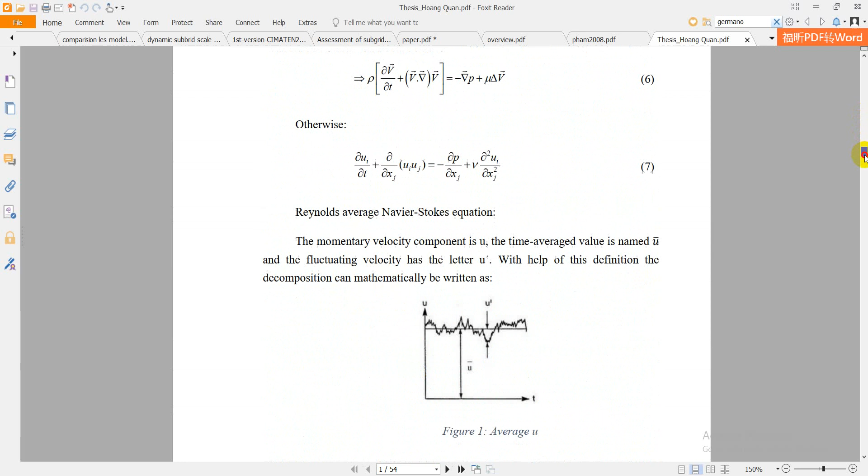So firstly, in OpenFOAM I use the RANS, Reynolds-averaged Navier-Stokes equation. After we solve the turbulence and the velocity pressure, we want to solve the energy equation. Here is the energy equation. I want to solve in transient flow, so I add the DT.

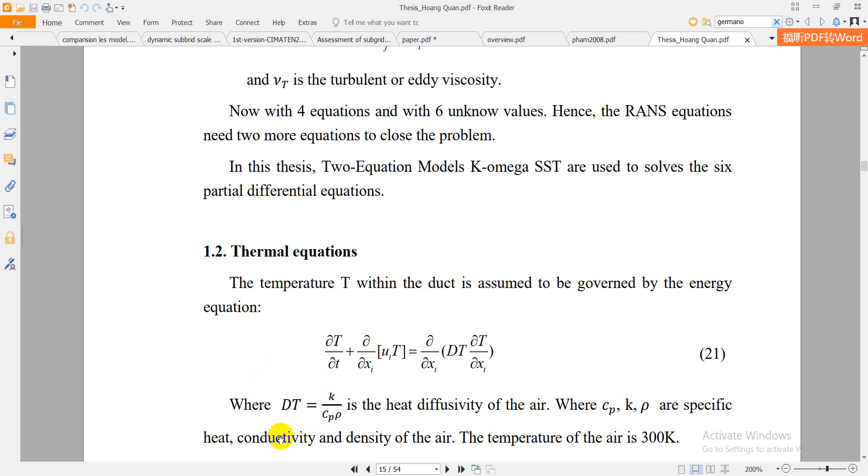DT is the heat diffusivity of the air, with K the air conductivity, Cp the specific heat, and rho the density of the air. So I will add this equation to pisoFoam, and change pisoFoam to my pisoFoam, so the software can solve the temperature for me. I will let you know how to do that.

Firstly, we must copy the software pisoFoam to these files. So just copy it here and change the name. For example, I will go to the software pisoFoam, cd application. Because OpenFOAM is like a lot of software, not only one, we can modify a software without any effect on another. So it's really good.

Go to incompressible, pisoFoam. Here is pisoFoam, and we have all the same things. I just copy this, copy it here, and change the name to my pisoFoam. In this software we have several files like createFields.H. I change the pisoFoam program to my pisoFoam, and then we copy the files here.

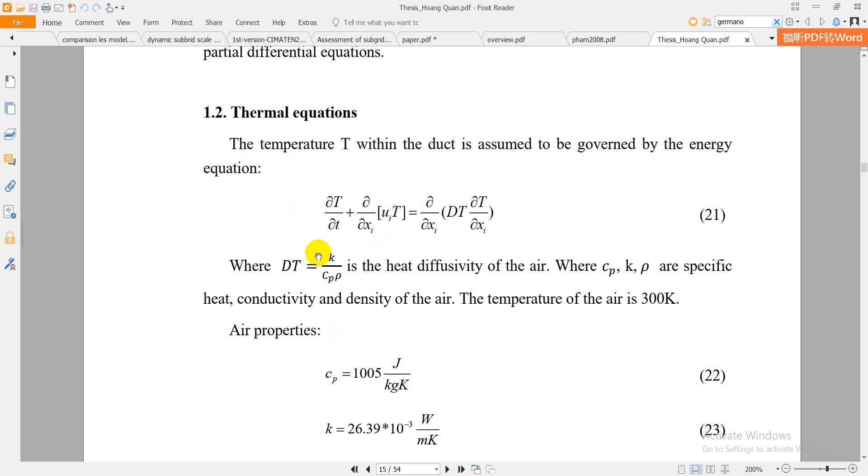It represents this equation, and you can learn more when you read how to write the derivative equation in OpenFOAM form. Then we solve this T equation, solve this equation, and then write it to the mesh file. Here you solve the equation. This represents this equation. All right.

And the next thing I want to show is the P equation. Everything is okay, right? The P equation is solved for pressure, and the U velocity equation, the U equation, is solved for velocity, and the turbulence, etc. And then when everything is done, we go,

I just go out and go to the directory, and cd e, cd mnt e OpenFOAM, cd application, cd solver, myPisoFoam. Here is the file I just modified, and then we just type wmake, and then everything is done.

Make. No. Oh, okay. Let me first, because I had done it previously, I just delete the library of this. Let me check again. And you can go here, and everything is done.

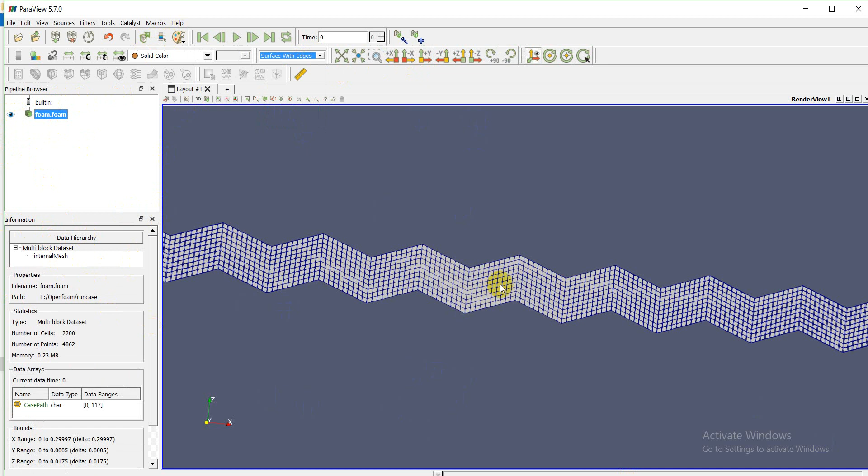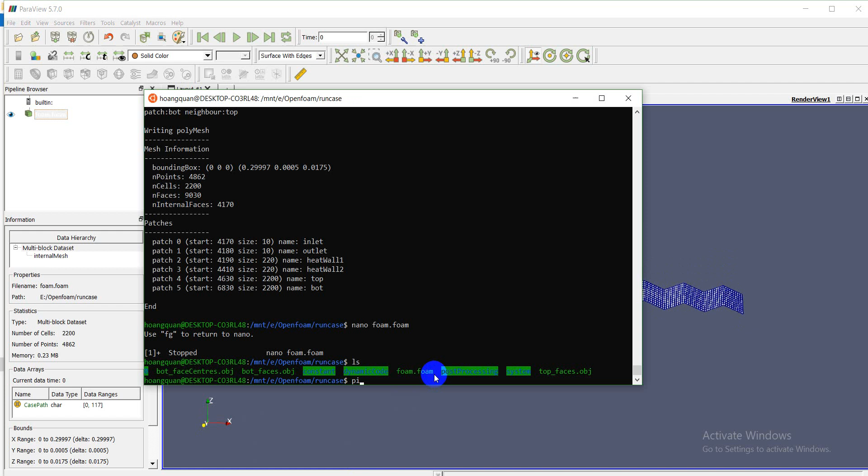Here is the mesh I just created. Very close. So I will run myPisoFoam on that. Firstly, I have the mesh, I run pisoFoam, and you can see the difference, and it's running.

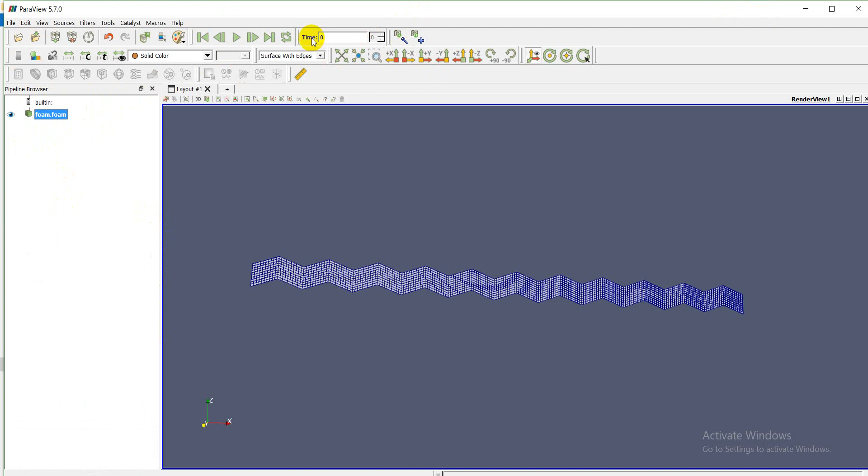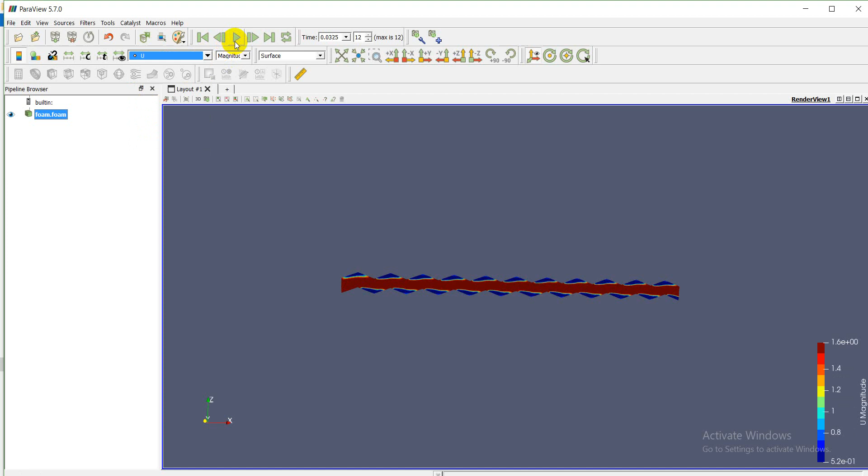Reload file, open foam.foam. Here I have several cases, so I open that. Wait a little bit. Ctrl+C to stop, and then we have several cases here, so just open that, and here you will see we don't have the T. We don't have the temperature here. So I want to use myPisoFoam for that.

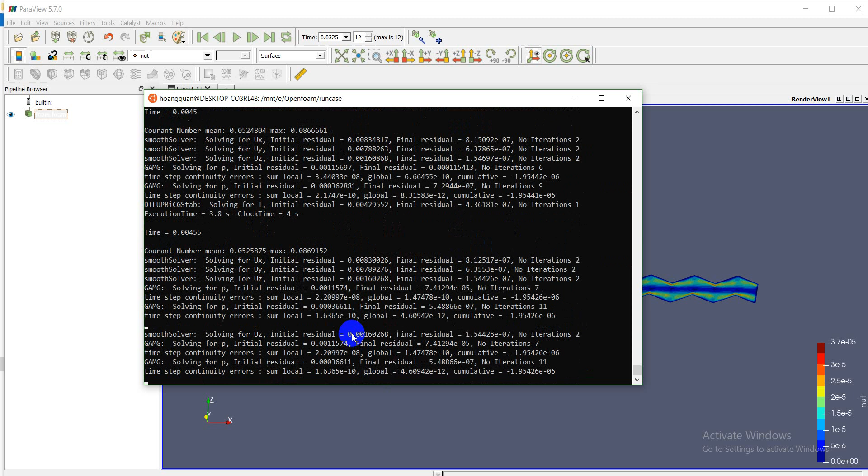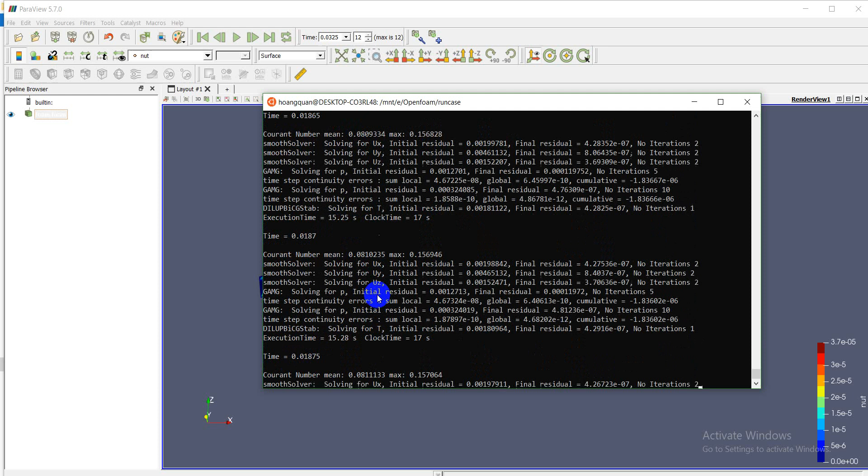So firstly I will delete all the time folders, keep 0, delete the others, and then I will use myPisoFoam. It's running, and I will show you the difference. Here we don't have the temperature, but when I use myPisoFoam, the software will show temperature for me. Wait a little bit because I want to get a beautiful result.

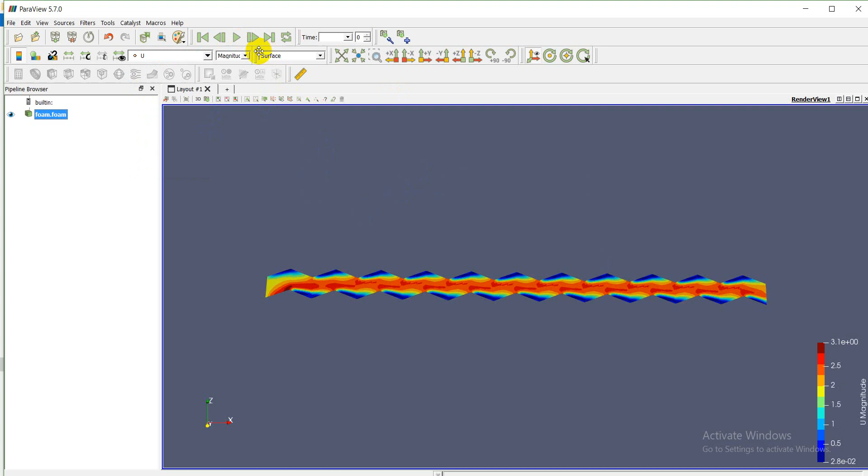Reload file, and now we have the temperature, right? See the temperature distribution. I set the heat flux inside this wall, so the temperature starts here. T, and we can reload file. I use an LES turbulent model, so it looks quite awkward, right? But when it goes smoothly, we will see the difference.

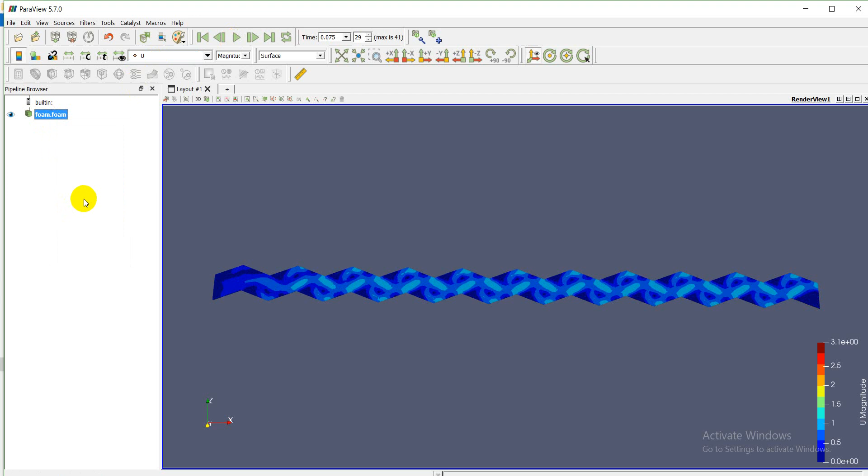Okay, let's delete that and open it. Open temperature, and you can see the development of the temperature inside this. I also apply the velocity inside. Reload file. And you can see the temperature also fluctuates, right? Reload file. Temperature distribution.